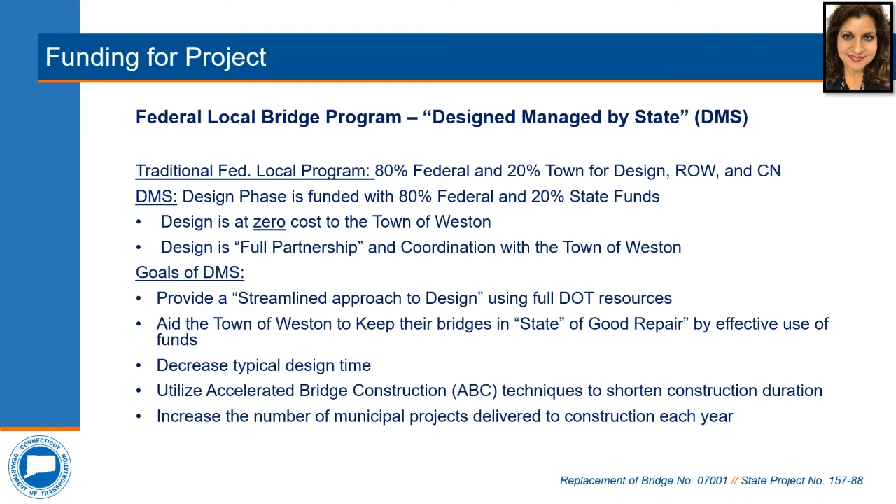Hello, this is Weston Town Administrator Jonathan Luiz. Thank you for listening and/or viewing this public information meeting on the subject of the Michaels Way Bridge Project. The Weston Board of Selectmen wants members of the public to be well informed of this project. With that being said, I would like to provide some background information about how this project has come to be.

As you may know, the state of Connecticut Department of Transportation routinely performs bridge inspections on bridges located on local roads in towns and cities across the state. In fact, the department had the bridge on Michaels Way inspected in January of 2019. Shortly after that inspection, the town of Weston received an inspection report. The report revealed that certain aspects of the bridge's structure had experienced significant wear. The information in the report was concerning.

Following a review of the report and an inspection of the bridge by the town's public works director, the town hired a Connecticut-based engineering firm to independently examine the report and the bridge. That engineering firm confirmed the accuracy of the state's inspection report and also provided assurances that the bridge in its current state could continue to be used by the public.

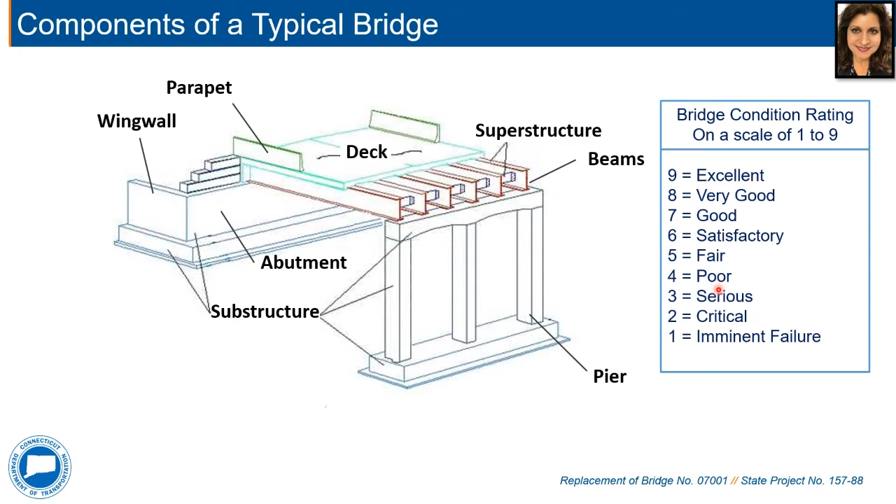Thank you, Preeti. Good evening. My name is Sean Ladati, and I will be presenting the technical portion of tonight's presentation of Bridge 07001, Michael's Way over West Branch Saugatuck River in Weston, Connecticut.

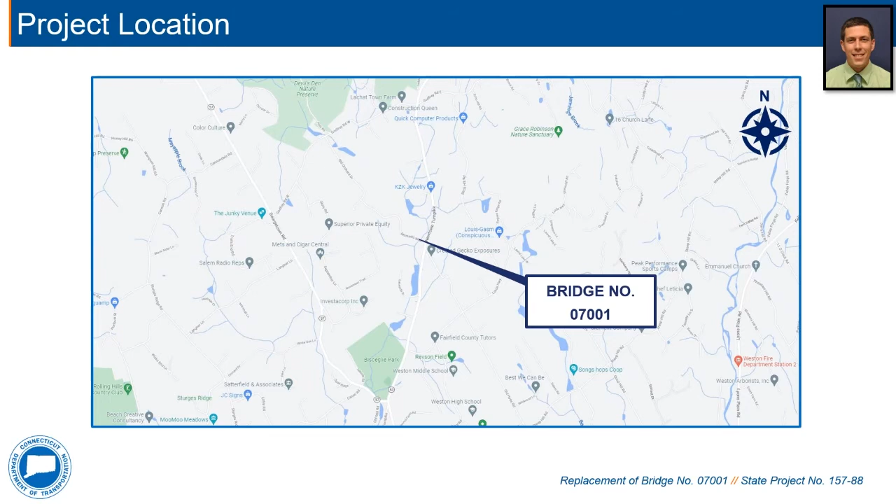The existing structure was built in 1995 and is comprised of a timber deck with a bituminous concrete wearing surface, supported by 6 steel rolled beams on pile-supported abutments. The bridge has a 60-foot clear span.

The average daily traffic, or ADT, along Michael's Way is approximately 208 vehicles. This is based on the 2020 Connecticut DOT traffic log.

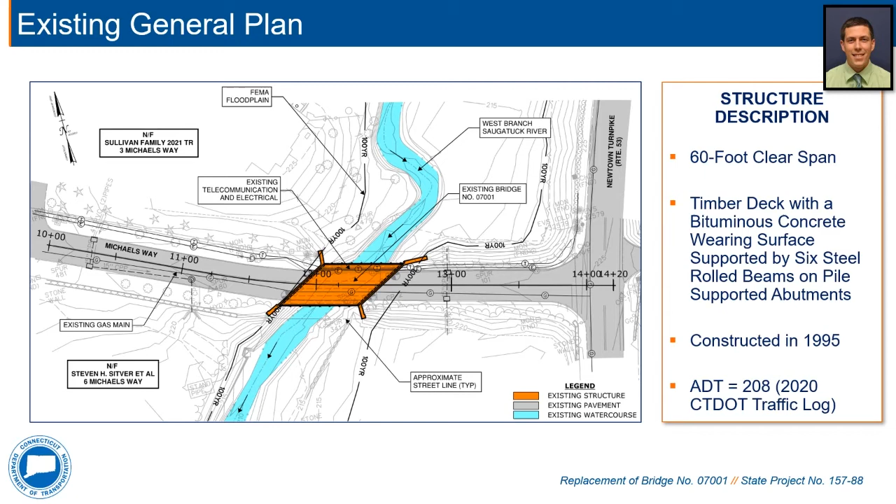A 2-inch gas main is located under the southern side of the roadway, and 4 4-inch conduits containing telecommunications and electrical facilities are located under the northern side. There are no aerial utilities located on this project site.

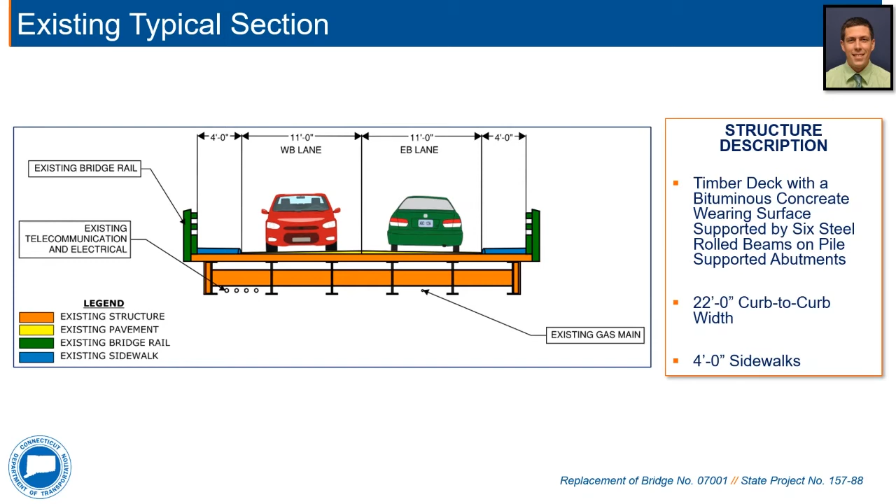The existing bridge has an overall structural length of 65 feet and has a span length of 60 feet. The existing structure is not hydraulically adequate.

The Connecticut DOT Drainage Manual classifies the existing bridge as an intermediate structure with a 100-year design storm event and a 500-year check storm event.

For the 100-year design storm event, hydraulically adequate intermediate structures provide 1 foot of freeboard to the low point of the roadway and 1 foot of underclearance below the bridge low chord. The existing structure provides 3.6 feet of freeboard but does not provide any underclearance. The water surface elevation matches the existing low chord elevation.

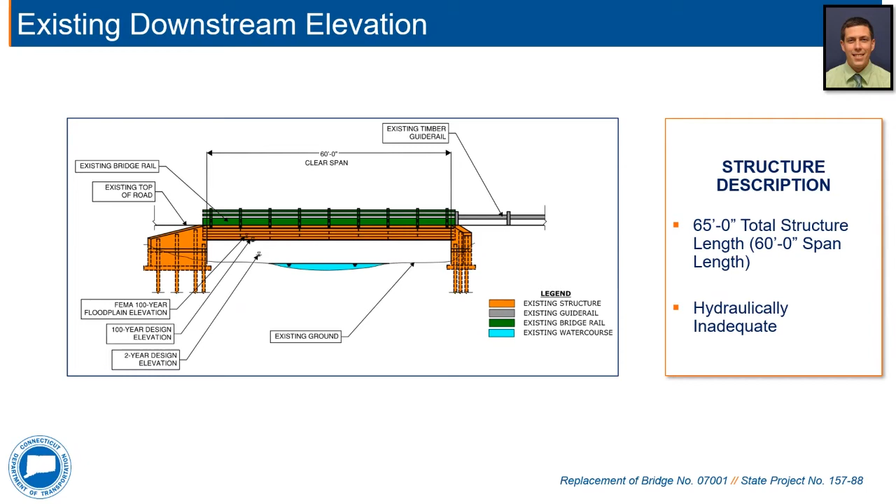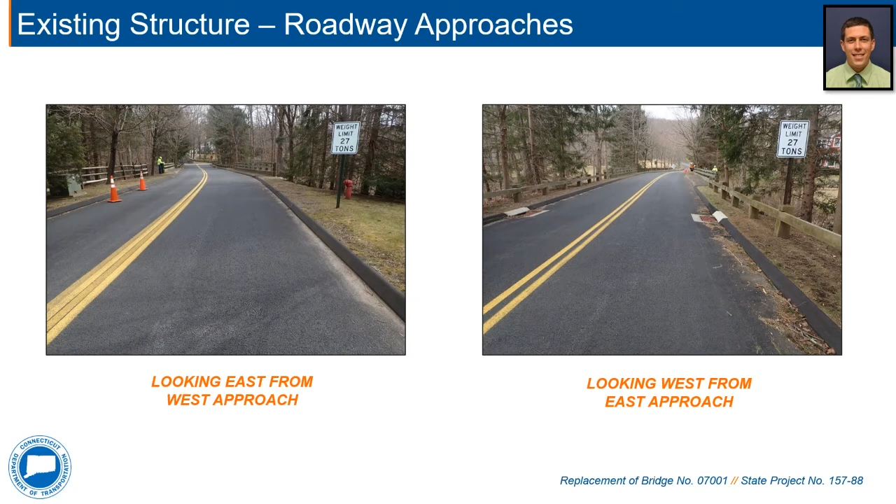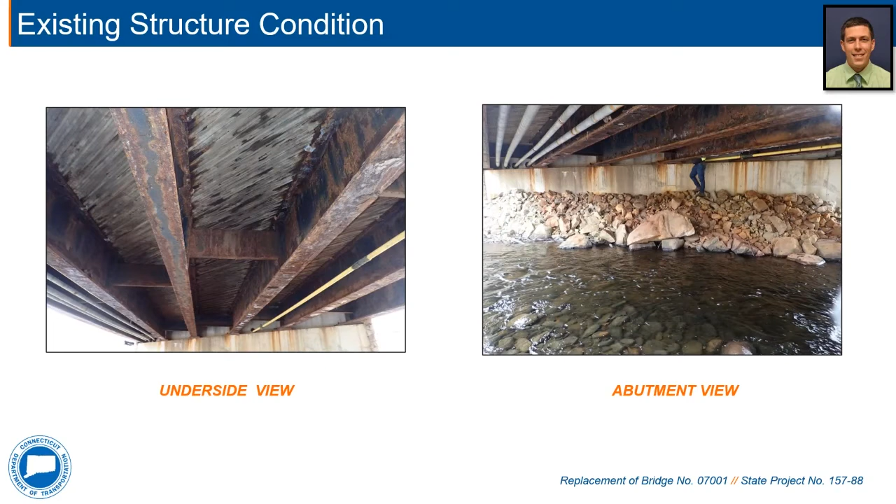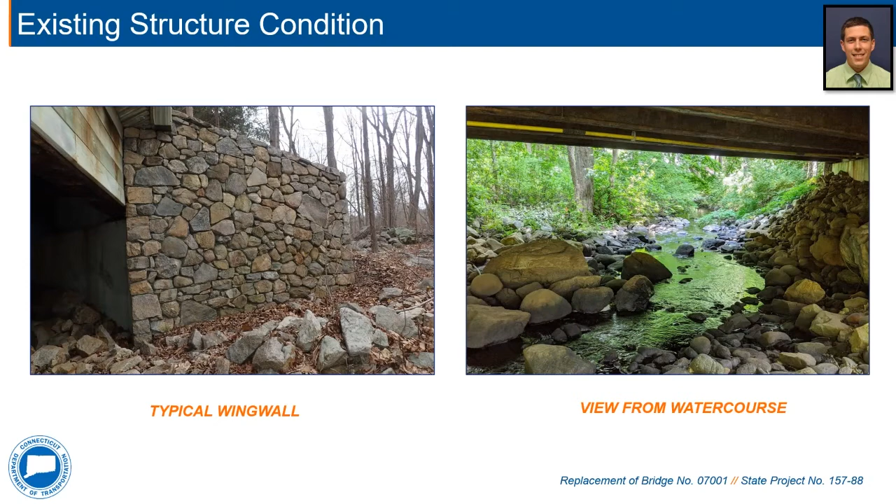The purpose of this project is to address the poor conditions of the existing bridge and return the structure to a satisfactory rating. The latest inspection report, dated February 20, 2020, classifies the structure in poor condition due to the superstructure, which was rated a 4, primarily due to the condition of the steel beams.

The existing condition of the deck is in good condition and the supported abutments are in satisfactory condition. The bridge is currently posted for a weight restriction of 27 tons.

A soil boring program and geophysical analysis were performed to determine the subsurface soil conditions, the approximate location of the existing bottom of piles, and whether the existing substructure could support a new superstructure. Based on the initial findings, it was determined the existing substructure cannot be reused based on the anticipated loads of the proposed superstructure.

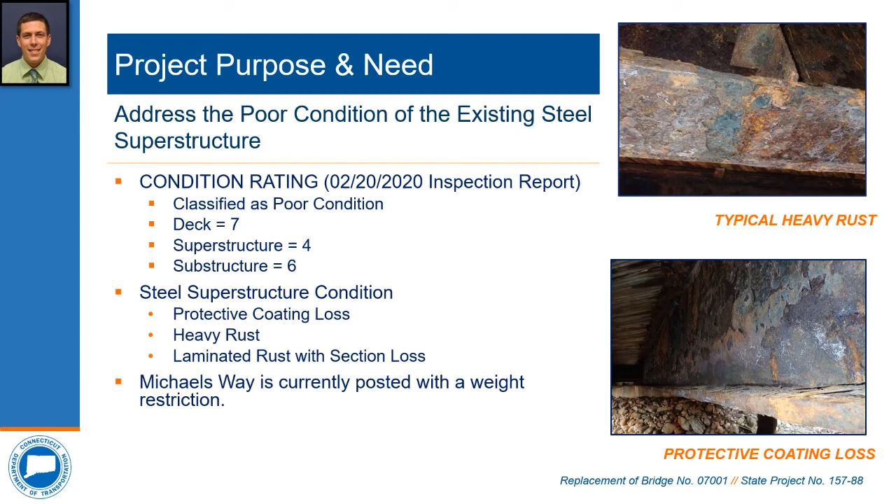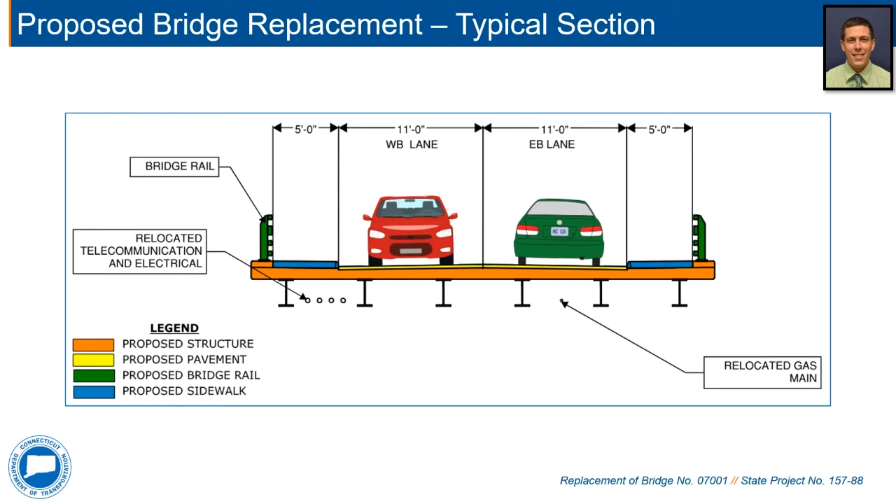The vertical profile of Michael's Way will be raised approximately 6 inches to improve the hydraulics at the bridge. The vertical curves at the eastern and western approach will be reconstructed to meet current design criteria for crest and sag curves.

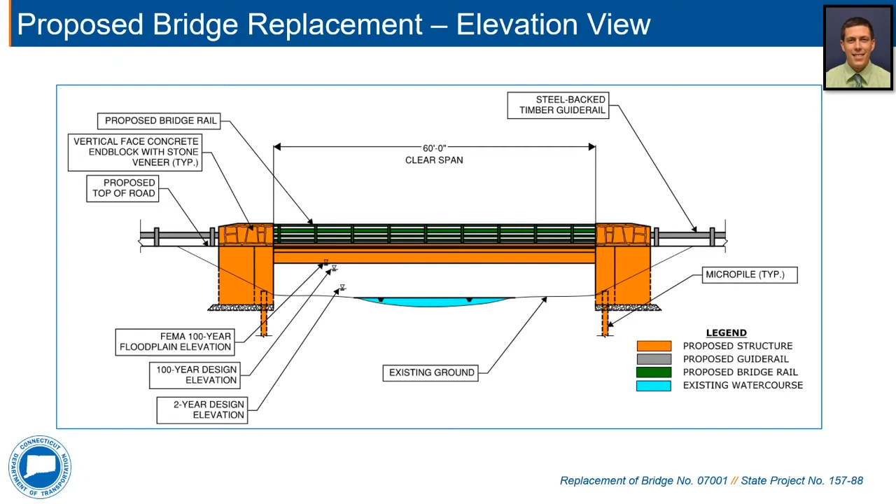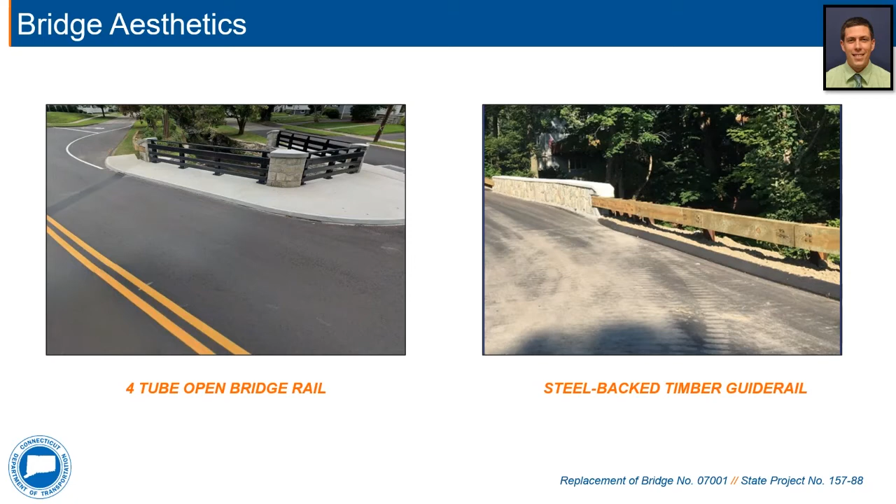The selection of the material at the end blocks will be determined by discussions this evening and in future coordinations with the town.

Emergency services, the post office, and the school district will be coordinated with during design so they can plan accordingly prior to the start of the detour.

As previously mentioned, the utility impacts include temporary support and protection of the existing telecommunication conduits, electrical conduits, and gas main. These will be reattached to the new structure. BL companies will coordinate with all utility companies throughout design and construction.

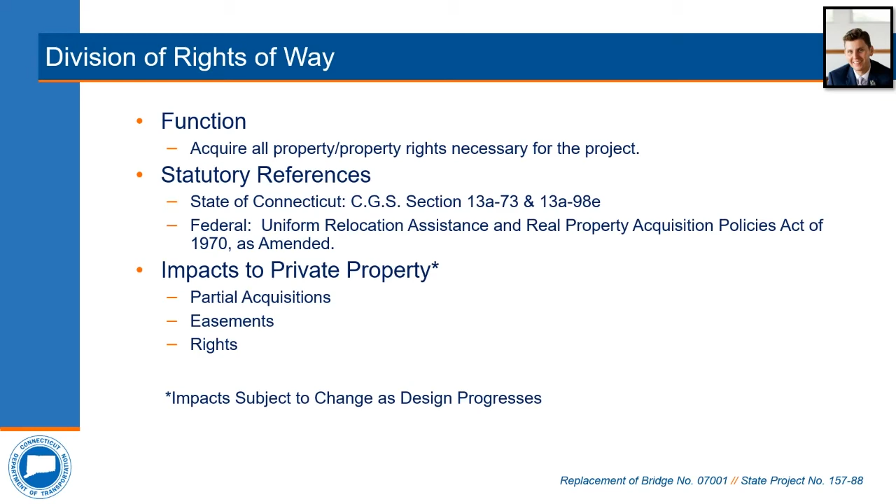Once property impacts have been established, each impacted property owner will receive a letter of intent to acquire along with a property acquisition map. The letter initiates the right-of-way process, and the map provides a detailed overview of the specific right-of-way impacts. Soon after the letter is received, a valuation process will take place, and once a value has been established, each impacted property owner will receive a written offer of compensation.

Property owners will be given time to consider the offer and negotiate should they wish. If an agreement is reached, an acceptance document will be signed, and a closing will take place at a later date. If an agreement is not reached for whatever reason, the state will utilize its power of eminent domain and

acquire the property rights through the condemnation process. Now, I understand this has a negative connotation, but many times this is done to keep a project on schedule. If the state elects to pursue eminent domain, the original offer is deposited in the court system, and property owners can continue negotiations or file a formal appeal for a reassessment of damages through the court system.

Please note all appeals must be filed within 6 months from the date in which the state files for eminent domain. And that is all I have for tonight. Thank you for your time.

Thank you, Dennis. This next slide shows our estimated construction cost and schedule. We are currently estimating a construction cost of approximately $2.95 million, which will be paid for with 80% federal and 20% municipal funds. At this time, we anticipate construction to begin in fall 2023 and be completed by fall 2024. Although construction is anticipated to start in fall 2023, the detour is not anticipated to start until

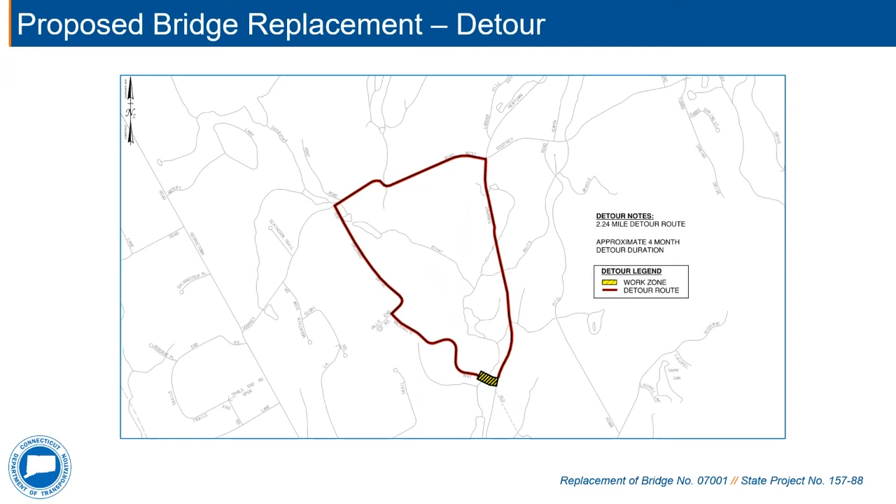The original scope change was presented to the town's Board of Finance and Selectmen in December 2020. At that time, a very preliminary cost and schedule were presented based on similar superstructure or similar full replacement projects. And now, as being presented tonight, the cost and schedule is being presented based on the final preliminary design.

Okay, thank you, Sean. Next question: will there be advance warning of road closure? Sean, can you please take this question?

Yes, the contractor will be required by contract to post construction signs with advance warning of the road closure. We will also be coordinating with the town to keep the public informed of the construction and detour schedule as the design progresses and construction starts.

This is Steve Frazier from BL, just wanted to jump in regarding the advance warning signage. We'll be sure the design accommodates placing those signs so that people driving along any of the roads will see them with enough notice so they don't need to turn around in people's yards. The intent is to give them enough notice to turn around properly, either in a cul-de-sac or further down the road.

Okay, thank you for adding that, Steve. Next question: how do they decide on stone or cheaper alternatives? Shouldn't it maintain the original look?

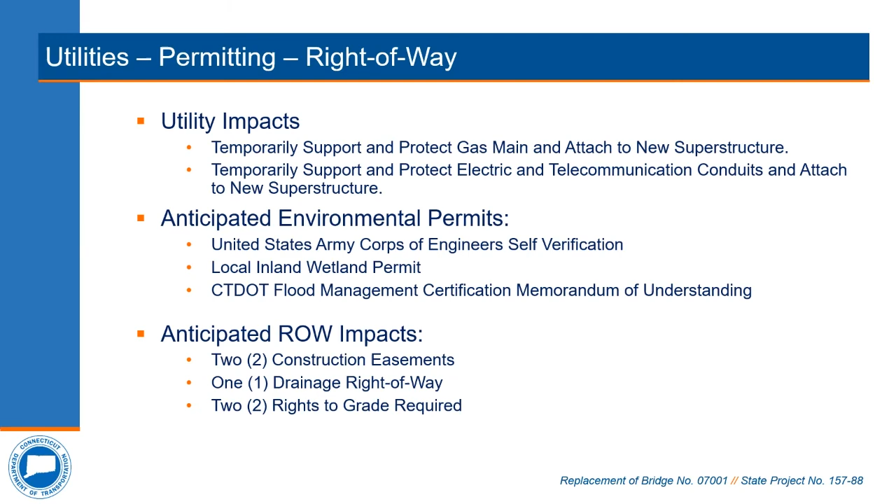Next question: there are no sidewalks on Michael's Way, or in fact anywhere in the town of Weston. Some of the bridges pictured in the presentation do not have sidewalks. Would it not reduce cost and environmental impacts to omit the sidewalks from the design?

Sean responded that they were working to match the existing bridge, which has sidewalks. Typically, when a bridge has sidewalks, they tend to keep them there to future-proof the design. Environmental impact is being minimized by reducing or eliminating any in-water work, and by maintaining approximately the same footprint as the existing bridge.

The following email question was asked: how will snow plowing work? Is there a runoff plan in the event of storms and the street is blocked? Sean, do you want to take this question, and does the town want to weigh in as well?

The contractor will be required to do any snow clearing on the project site, and coordination will occur with the town for plowing of Michael's Way itself. This will be coordinated during design. The roadway closure is anticipated to be in the spring of 2024, reopening 4 months after, so the road closure should not occur during winter.

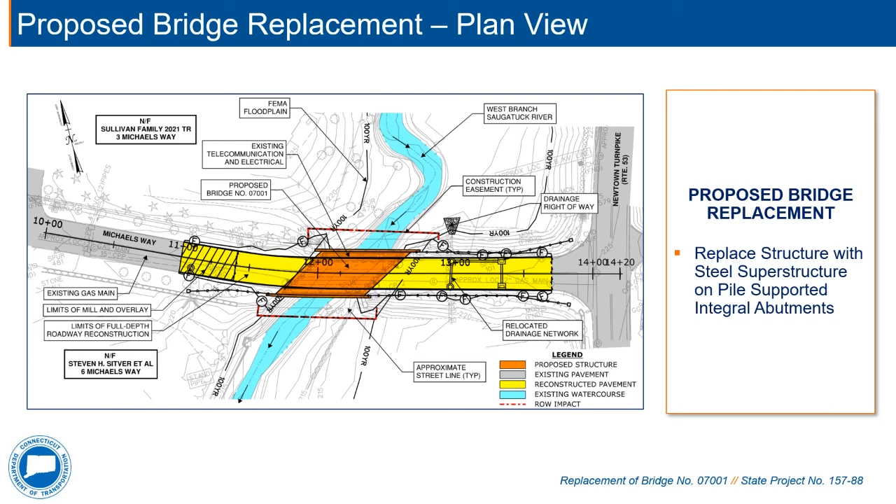Next question. The following email question was asked: Will security be provided to assure that workers do not trespass, eat, sleep, or park on private property?

Sean, do you want to take this question, and maybe the town wants to weigh in as well? Yeah, so typically for this construction project, we would have a construction inspection team brought on through the state and town. They will be acting as a representative of the department and the town, so they would help oversee these concerns.

This is Jonathan Luiz, Town Administrator. In addition, the town will participate in regular meetings on site, so we will be able to see any evidence of people eating and leaving behind trash or anything like that. If the site's messy, we would also tell people to clean it up. But with the continual presence of inspection services on site, I think the chances of them doing those things are very, very low. And if they did, we'd learn of it very quickly from the folks inspecting on site continually, and we'd address it immediately.

Thank you, John and Sean. Next question. The following email question was asked: Who is responsible for making sure construction debris, food, etc. is kept off of private property?

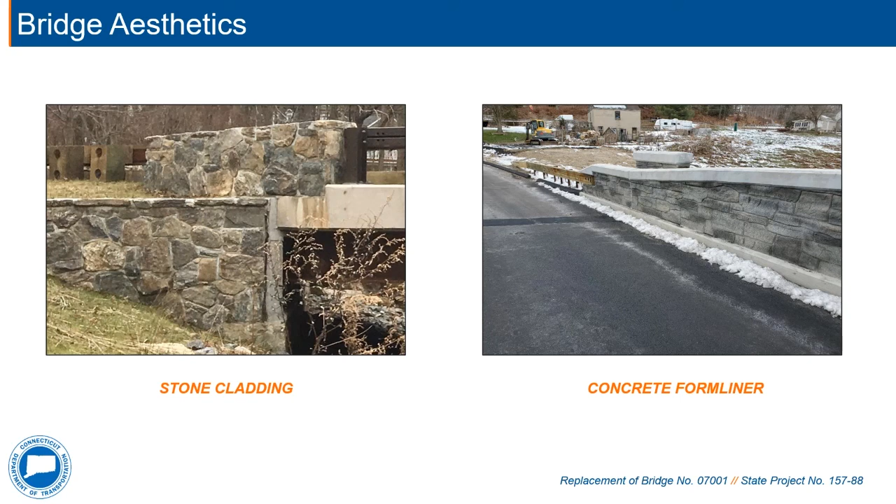Okay, thank you, Sean. As of right now, we don't have any more questions coming in, but we will give it another minute or two if you guys would like to ask any more questions.